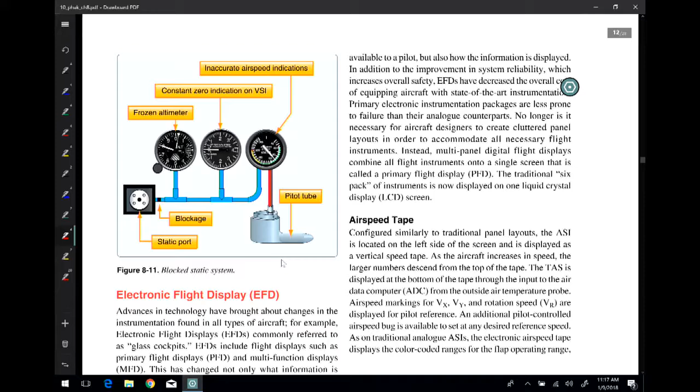The difference is when we talk about the bottom of the white arc on the digital display, there really is kind of a bottom. In other words, because it's a vertical presentation, there's a real bottom, whereas on the analog gauge, the bottom of the white arc technically is at the top part of the airspeed indicator, and sometimes that gets confusing. So just know that the low number is what we call the bottom. Make sense? Okay?

So as we look at this, and we look here, something is, oh, that's what's catching.

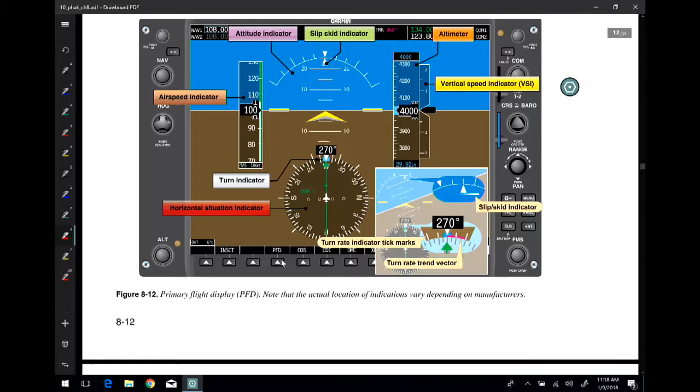As we look at our primary flight display, what we're looking at from a digital standpoint, the background of the primary flight display on a G1000, which instrument is that? On the horizon... The background that you see on a G1000, in this case with the one that's in your book, is just a standard horizon where you have blue on top and brown on the bottom.

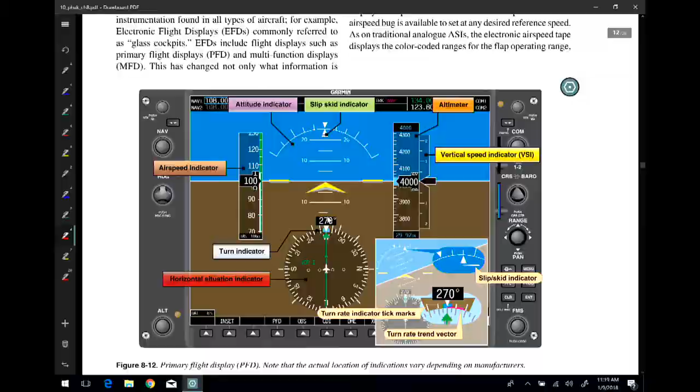And when we look at the one with synthetic vision, the bottom will be green, representing the ground, depending on what part of the world you're flying in. That green color is a part that changes with your altitude. There's a legend that tells you how to tell where you are by the color of that lower portion, and it encompasses the entire width of the screen. What instrument am I talking about? The GPS? What instrument?

Attitude indicator. So now we're talking about what type of instruments? Three categories. We've talked about pitot-static.

I have a question. Let's answer this question first. No, the question I asked.

Gyroscopic. So the attitude indicator is the first of what we call the gyroscopic instruments.

Joseph, you had a question. It's about the lower bottom right corner of the G1000, the LCL, I think it's called. Is that a clock? Yes, but why is it showing 18 for me? It's showing local time, and this hasn't been set up yet, I just got this loaded. Oh yeah, it just got loaded. But that is a clock.

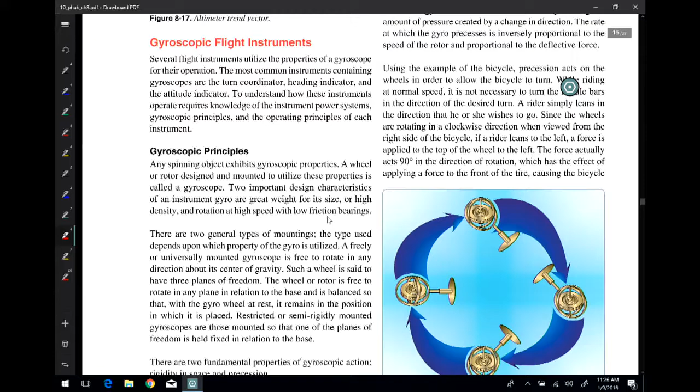By its spinning, we'll talk about how the spinning happens here in a minute. By its spinning, this disc happens - tell me where the magic happens with gyroscopic instruments. Okay, so now you're saying that you get certain indications from it as there is movement around the gyroscope, correct?

How can that happen? How does that work? Solomon? What do we call that? What do we call that part where it tries to stay in place? What do we call that? No. What do we call it?

Rigidity in space. This is the principle by which a gyroscope gives the pilot useful information. The inertia wheel on the gyroscope, once it starts spinning and it has some mass to it, when it gets spooled up to the right speed, it becomes somewhat stationary.

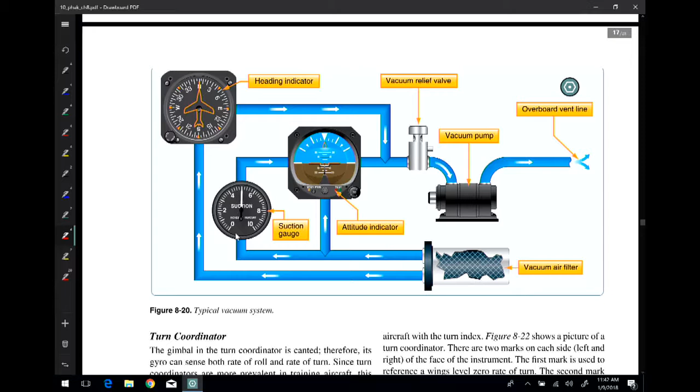Bang on them? Maybe not. They all read 0. If you're at rest, technically, when you're sitting still, they shouldn't be moving, right?

But then at some point, you have to get from the place where you started your engine to where you can take off, right? What do we call that? Taxi. So let's say this. Are you always just going to be in a straight line to the airport, to the runway? You're going to make some turns, aren't you? So what do you check to make sure that your instruments are working correctly?

You can try taxiing a little to make sure. Your heading indicator, what's going to happen with it when you make a turn? It'll turn a 45-degree angle. If you're turning 45 degrees, then it will, I guess. You're going to make a series of 90-degree turns, right? So we can check that. Your heading indicator, you can check that on the ground before you launch. What about your turn coordinator?

No, not until you're in the air. Or if you like, if you Tokyo drift or something. No, please stop. Thank you. The turn indicator.

So when you turn an airplane on the ground, are you able to get a bank? No. So what's going to move on your turn indicator? Oh, the little bead, the little ball. This little inclinometer. So your inclinometer is going to go toward the outside, right? So we can check that when we taxi.

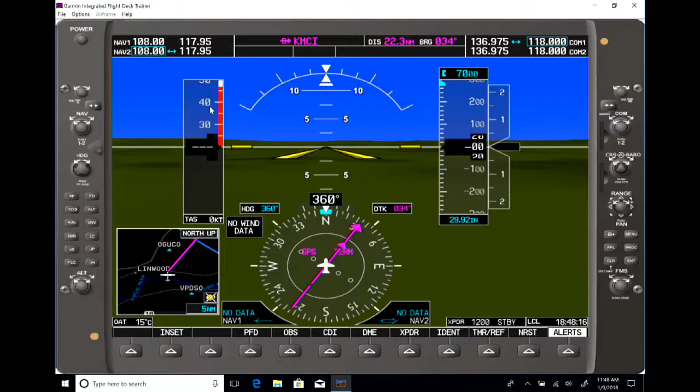So there's a lot of ways for us to check our instrumentation before we launch. The G1000 is almost cheating because it runs a self-diagnostic as it spools up, and it will tell you if it's working properly or not. But don't get into the habit or into that pitfall of relying on that. Engage the supercomputer here and see: does this make sense to me? Practice that on the ground before you get in the air. Make sense? Okay.

So when we look here at the turn coordinator, we've got a couple of things going on, right? We show with the airplane indicates that we are what? Banking—thank you, banking, not necessarily turning. Even though this is called a turn coordinator, what that shows is the bank angle. What do these little hash marks mean?

Wait, which hash mark? Those hash marks on the attitude indicator, like on a G1000, that's the thing at the top showing your degrees. That's level. So those two hash marks, if you have your wings on those two hash marks, what does that indicate? Your wings are level.

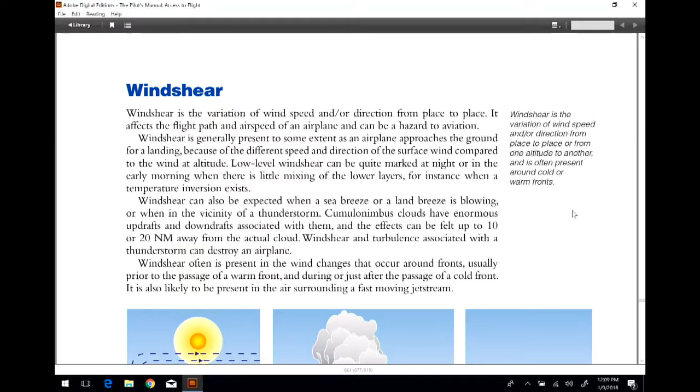Also, anytime the winds are greater than 25 knots over the ridges, you should also expect wind shear in certain isolated locations, because that stuff can just come out of anywhere. These are some of the areas here that we can see, and again, as Cooper deftly read there for us, that's where they can happen. The big thing, guys, is understanding it can happen anywhere, anytime.

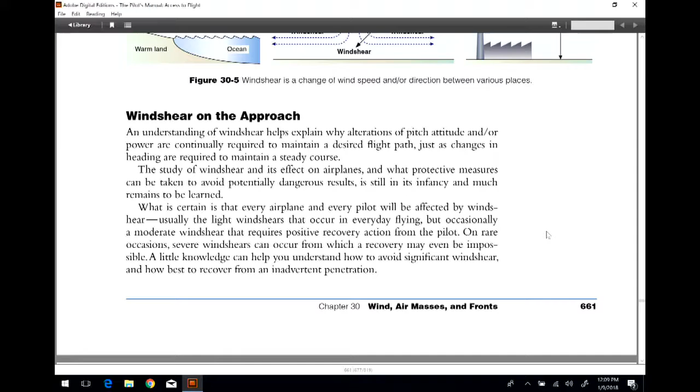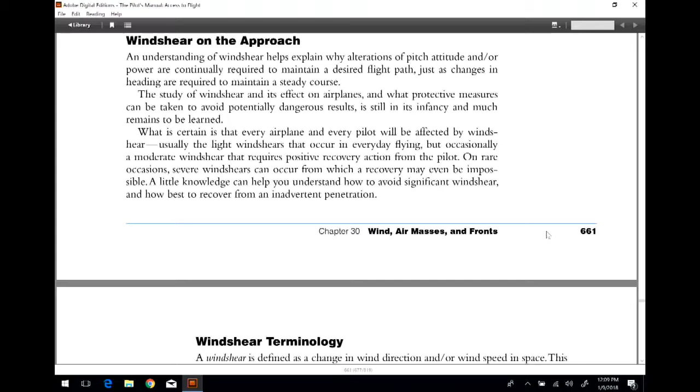Wind shear on approach. Let me ask you a question. Those of you that have gone through the training on the desktop sims, why is it that I am such a zealot about keeping your hand on the throttle anytime you are at or below 500 feet AGL?

Because when those conditions change quickly, what is going to be an asset that you have? Power. Use it. That is why, when you start the Flight Academy piece, you're going to hear your instructor talk about only removing your hand off that throttle when you're on the ground or higher than 500 feet AGL when you have a compelling reason to do it. Let's say, for instance, you're just taking off and you're asked to change frequencies or whatever. You could do that—normally you're going to fly with your left hand and change that with your right, but then your hand comes right back down onto that throttle. You just never know. So that's one of the reasons why.

Expecting that wind shear on approach, when you have windy conditions or you're flying through a temperature inversion on your approach, you can expect that to happen. Your airspeed indicator is going to be a pretty good barometer of what you might expect, as well as knowing what the temperatures are at the various levels as you're beginning your approach.

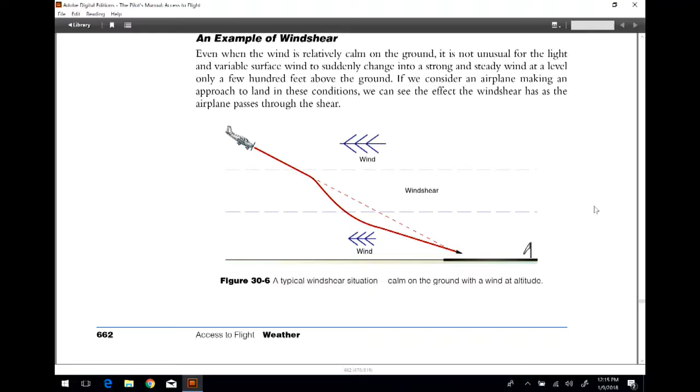So you're pitching for an airspeed, powering for an altitude, is kind of the way that works. Except on an instrument approach, more on that later. So these are the conditions you can expect. You can expect changing wind conditions even if the wind is coming right down the runway. That's what figure 30-6 shows us.

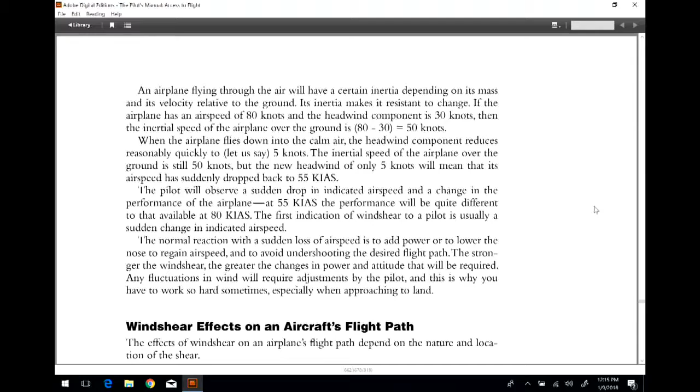It's that sudden drop in forward airspeed when your airplane is configured for a particular descent at a particular airspeed. Then all of a sudden you lose that headwind and you get that tailwind, and you get this. That's why you constantly have to have your hand on that throttle, because picking up an unforecast tailwind over the numbers, just like when you're landing and beginning your flare, is not uncommon. And so you have to be ready, because you do not want to let that airplane drop.

Effects on the flight path: we talk about overshoot and undershoot. So as we look here at the overshoot and undershoot, let's look at this. Remember, in this figure, figure 30-7, understand that the angles they're showing you here are for dramatic purposes. You would never normally have that kind of angle of attack. Do these make sense to you guys? Do you understand kind of how this might work?

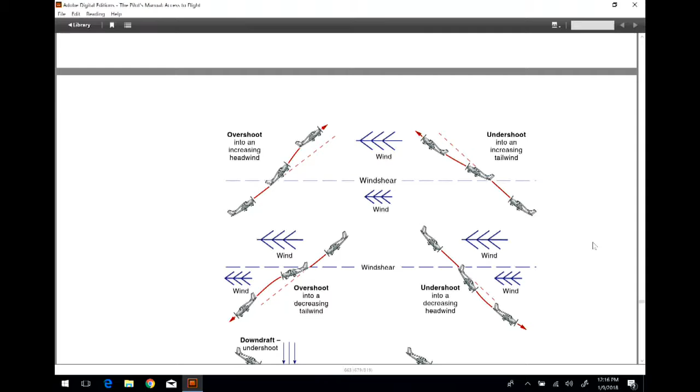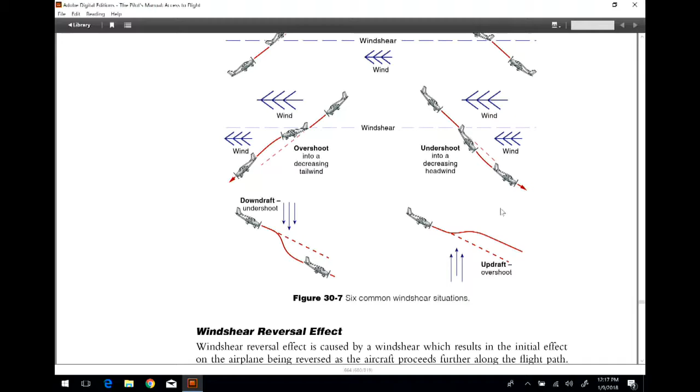Because again, remember, if you look in the lower left and you see that you've got a higher wind and then a lower wind, ultimately it's going to push you, but you're going to drop. And so you constantly want to be checking that airspeed indicator to know exactly what's happening to your craft. You will also, in some cases, be able to hear a difference of the wind going around your canopy, even with your headsets on. So that can be another big indicator here. The downdraft, you can be all set up, and then the next thing you know, you're way, way low. Or you get that big updraft, and the next thing you know, you're too high.

Yes, dear. So if you found yourself in one of these situations, would you just adjust power accordingly? Correct. Okay, correct. Now let's take a look at this.

Well, when that happens, one of the things is that you're praying, first of all, that the report is correct still. Second of all, you may want to contact Tower and ask for instantaneous winds. Tell me what the winds are right now. Now, why would you ask for instantaneous wind as opposed to just a wind report?

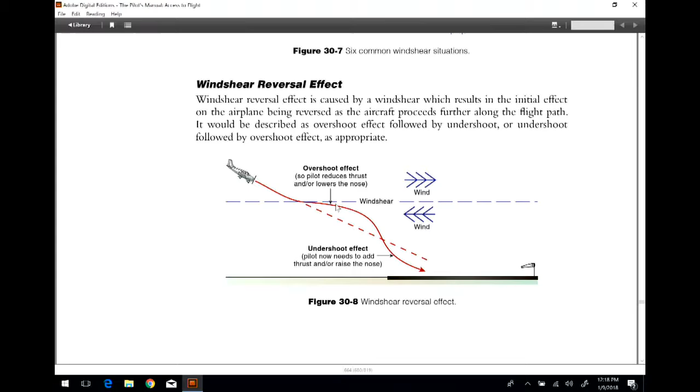Possibly. Would they give you like the old report, but if you said instantaneous report, they would give you what it said? You're on the right track. Normally what they give you is a 10-minute average, unless you ask for an instantaneous wind report. If you're so far out that you cannot make good visual contact with the windsock, or if you're in instrument meteorological conditions and can't see the windsock, ask for instantaneous winds. What are the winds now?

Because that way they'll still tell you if the winds are in the direction you need, so that you have some form of a headwind in order to land. Because that'll pucker you up pretty good. If you notice you're on a 3-mile final and you're thinking, holy crap, I've got a 40-knot tailwind - what are the winds on the ground? Well, if the winds on the ground are a 5-knot headwind, guess what's about to happen? Somewhere between here and here, you're going to get that wind shear, and you're going to fly through that zone, and you better be ready. Okay?

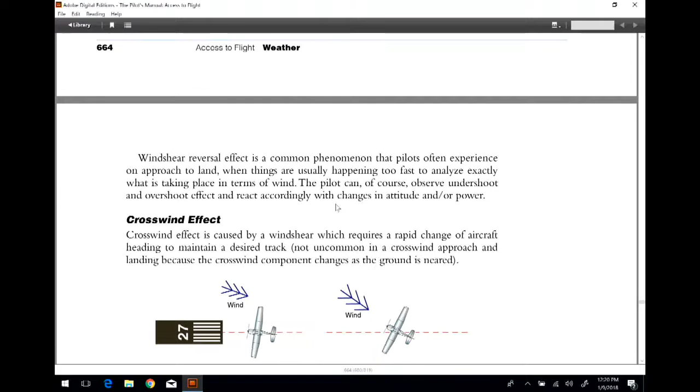Notice this here as well. What do we know about the winds? The higher winds are going to be stronger, the higher above the ground they are, right? The closer you get to the ground, in most cases, the slower the winds. So here you are, set up just like you see in figure 30-9. At 1,000 feet, let's say, you may have a 20-knot crosswind component, but by the time you get to 50 feet off the ground, you may have like a 5-knot crosswind component. So are you constantly making adjustments here?

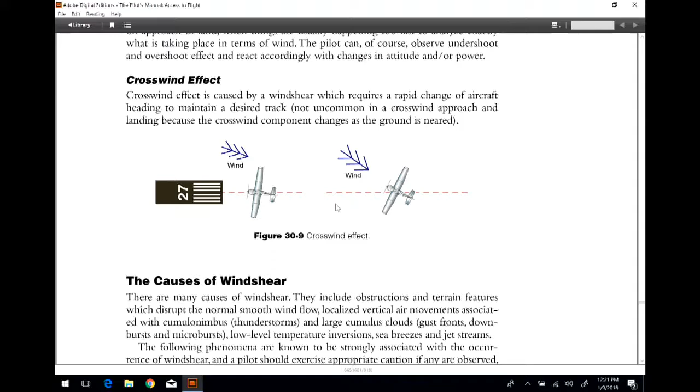Now in this case, it may not necessarily be a power adjustment. This may be a rudder adjustment, an actual control adjustment. But you're constantly making those adjustments, either visually, as you see the runway, or on an instrument, checking your course deviation indicator on whatever you're using, whether it be radio navigation or a GPS-based navigation aid on the way down. So power is one, but your actual directional component is another way to counteract the effect of these changes in wind velocities.

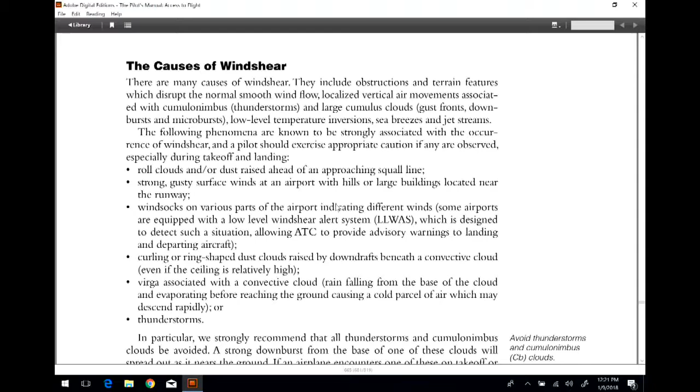Causes of wind shear. When you look at these bullet points, know each of those bullet points. They are test questions. Okay.

In the margins, right here, Harris, what does it say in the margins on that last paragraph on page 665? Avoid thunderstorms and cumulonimbus clouds. See, right there it says that - it says avoid those things. Why do we want to avoid thunderstorms? Because they're bad juju, okay? They will be the thing that will rip your little aeroplane apart.

Cumulus clouds, cumulonimbus clouds - we haven't gotten into the nomenclature of clouds yet, but cumulonimbus clouds are big rain producers and can ultimately become thunderstorms. Why do we want to avoid those? Why do they exist? Why does a big rain cloud exist? First of all, it's got a vertical component of lift. You have instability in the atmosphere, and you've got enough water vapor to make it all happen. Those are the ingredients to a thunderstorm. So you've got that vertical lift in an unstable atmosphere with plenty of water. You do not want to tangle with those. How far away from thunderstorms does the book tell us to stay?

20 nautical miles from the footprint of the thunderstorm. The reason I emphasize the footprint is because sometimes these clouds are not just cylindrical. You can look over and see a cloud and say, okay, from here to there I'm 20 nautical miles away. But if you look up, you may only be 10 nautical miles away because you can get that big anvil, that big mushroom look around it. So you want to stay 20 nautical miles away from the entire footprint.

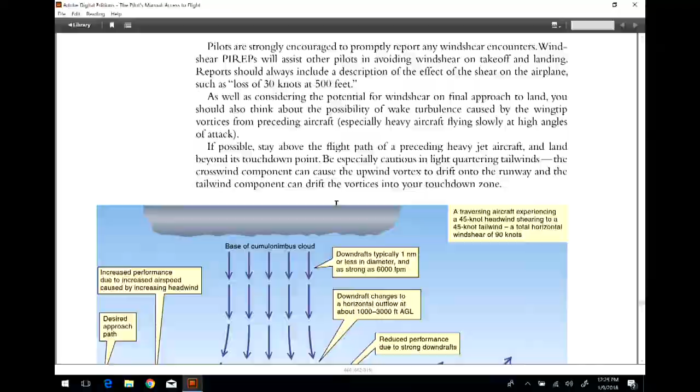Why are PIREPs useful? Because it's a report from another pilot? Yep. I think it could be useful because they already flew through the conditions. Here's what I just saw, here's what's happening to me right now, I just landed 5 minutes ago. Be aware of this. I know what's forecast, but I'm up here right now, I'm at 10,000 feet, I'm over this particular landmark, here's what's happening to my aircraft right now. That's pretty useful, right? PIREPs, when you're flying, are some of the most valuable pieces of information you can get as a pilot. Everything else is going to be a forecast, everything else is going to be a guess. Give me an observation, I'll take that every time. Okay?

Let's take a look here. Oh my goodness, what could possibly happen here flying underneath the base of a cumulonimbus cloud on approach? What could possibly go wrong?

Yup. And the catastrophic ending of that could be what? Undershooting the runway, hitting the ground short of the runway. Because there's some of this stuff, ladies and gentlemen, you cannot fly out of.